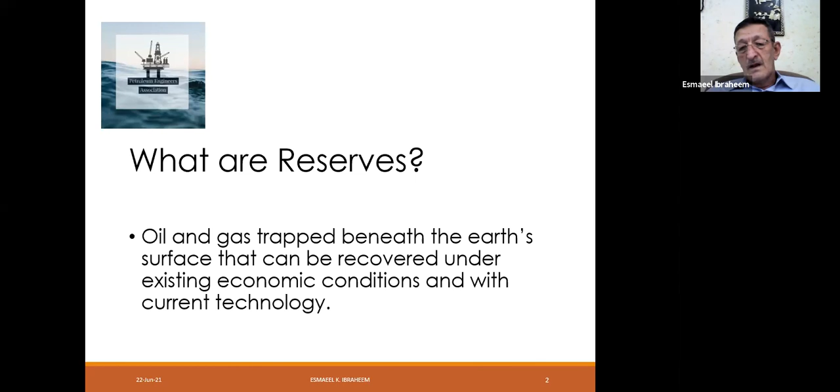First, there is a role for each person concerned with the petroleum industry. The most concerned person is the reservoir engineer. What is the role of the reservoir engineer? Optimize the depletion plan and economics. You have to look after your plan and how to optimize it. Develop reservoir models to forecast well and reservoir performance. This is done by simulation, and we will come later to what simulation will give you, and how to forecast the quantity of hydrocarbons and the performance of the well or the reservoir.

Also, reservoir engineers should perform reserve estimates and audits for financial accounting. By simulation or by the normal calculation methods, you estimate the hydrocarbon you have and be sure of the quantity you have. Then give it to the financial people to do the financial accounting and decide how much they will get from this result.

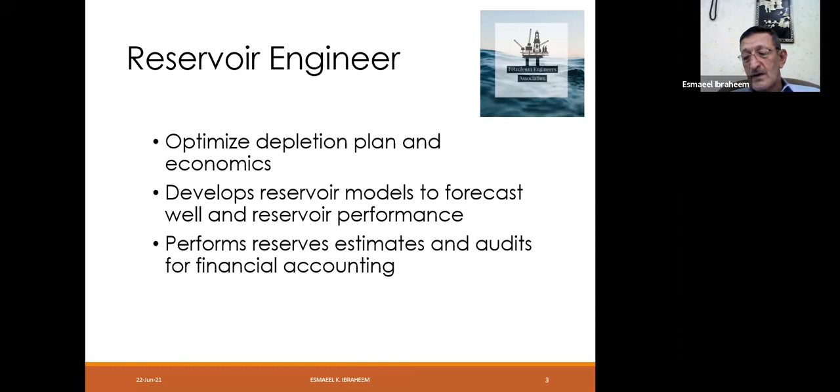This is your role, reservoir engineers. So be careful and be concise and be strict in your estimates, because later on you will be asked, oh, you gave us a wrong number, you gave us something that doesn't fit what we are seeing down there and what we can extract. So be careful, please.

Then, let's say for the discovery of any hydrocarbon, you have several methods. You have natural flow, you have artificial flow, and you have methods to improve recovery efficiency. If you cannot go with the natural, you cannot go with the artificial lift, which are the conventional recovery methods, then you have to go by improving recovery efficiency.

How to improve it? You can improve it in three ways. This is the enhanced oil recovery, EOR, and you can improve production or injection control. You have to have control over the production or the injection of any fluid you are injecting, either water or gas, or even sometimes we use some kind of flue gas, and some natural neutral gases like CO2 or nitrogen.

But in normal conditions, you usually use water to inject into the water zone in order to raise the pressure and the flow, and we push the oil. For example, we push the oil up to the required levels and push it to go through the producing wells. Then the third one is the strategic wellbore placement.

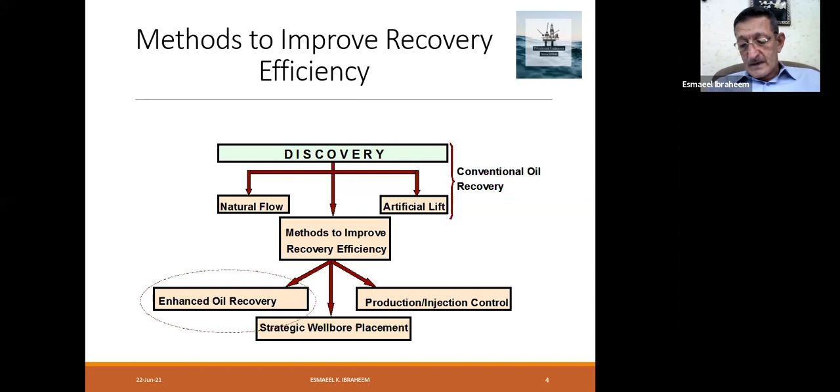Then what are the enhanced oil recovery or EOR processes? EOR processes include all methods that use external sources of energy and/or materials to recover oil that cannot be produced economically by conventional means. This is an explanation of the EOR, which tells you that this is the method or the process that you use

external sources, not the energy that you have, or the conventional means of producing this quantity of hydrocarbon. So you have to look for other energy to recover that quantity of hydrocarbon. So this is called EOR, which means that if you cannot extract or produce that quantity of hydrocarbon, then you have to use some external sources of energy.

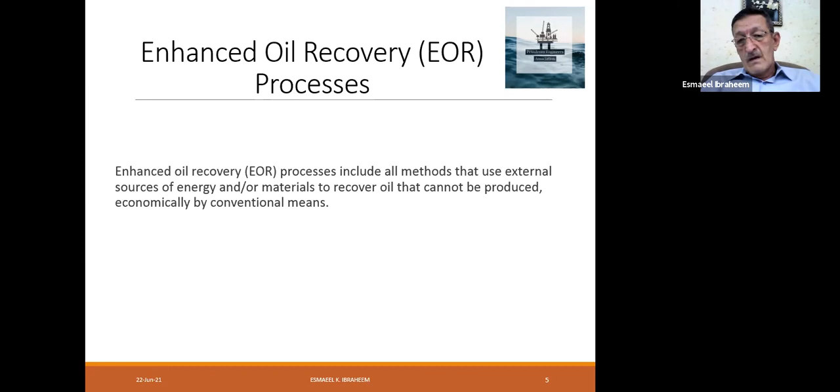Then, if we go to water flooding and enhanced recovery. Most of the companies nowadays, and I think you have seen so many examples of that, use water. They say that we inject water in order to recover the hydrocarbon. This is the traditional method actually. The traditional one is the easiest one, and the most available is water, so they can use it to recover what's left.

Most of the companies look after the economic side of the operations. So later on, if they find that this traditional method cannot be used to recover, or the recovery is very low, and the water oil ratio is rising, they go to the other EOR methods. The traditional methods are often called secondary recovery. Of course, as you know, we have primary recovery, secondary recovery, and tertiary recovery.

The primary recovery is one that uses the energy that's present in the reservoir, either by solution gas or by water drive or a combination of gas cap drive and water drive, or even sometimes gravity drive. And then we have tertiary recovery, where we go to the EOR.

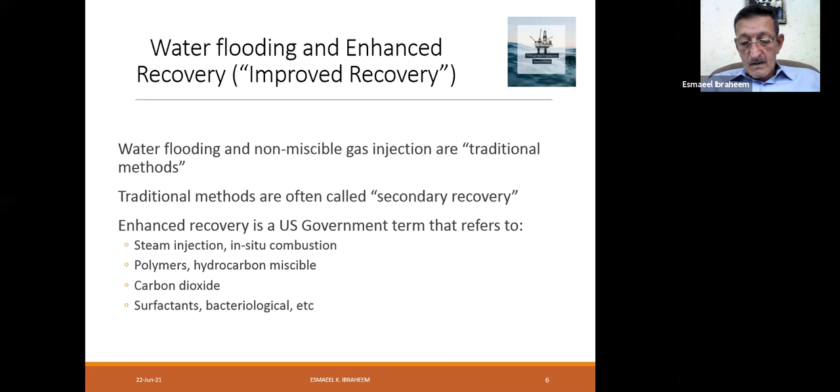Water flooding. The current improved oil recovery processes are water flooding, as we said. We explained what water flooding is; as all of you may know, it is a normal method. So water flooding, we have talked about it. Then we have thermal methods. Thermal methods include steam stimulation, steam flooding, hot water drive, and in situ combustion. Of course, we will talk about these methods one by one and see the difference between each of them.

And we have the chemical methods. In chemical methods, we use polymer, surfactant, caustic material, and micellar polymer flooding. This is a combination of polymers that makes the driving fluid that pushes the oil through to the producing wells, and we will go through them one by one later.

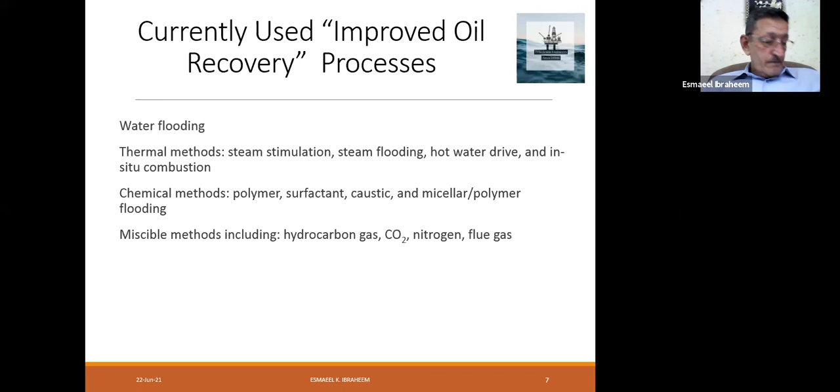All these methods, water flooding, thermal methods, chemical methods, and miscible methods, will come later one by one, but this is just to give you an idea of the meaning of improved oil recovery. These are the currently used improved oil recovery processes. In the detailed course, of course, we will have more time and more details about them.

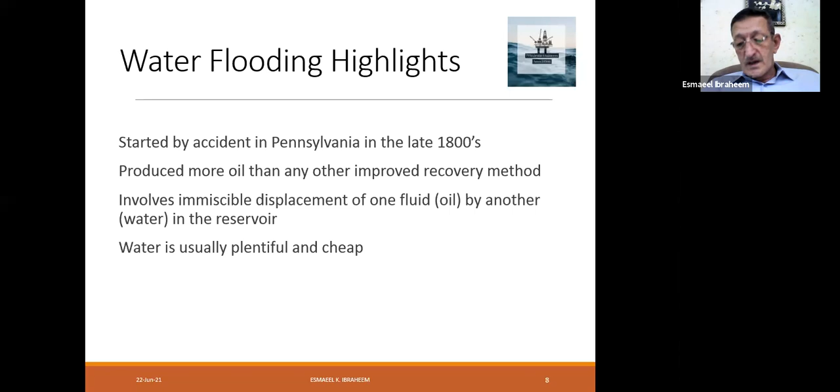Water flooding highlights. Water flooding started by accident in Pennsylvania in the late 1800s. It has produced more oil than any other improved recovery method. It involves immiscible displacement of one fluid, oil, by another, water, in the reservoir. Water is usually plentiful and cheap, so that's why it is widely used. Description: water flooding consists of injecting water into the reservoir. It is the most widely used post-primary recovery method. After the primary recovery method, we may use water flooding.

Water is injected in patterns or along the periphery of the reservoir. We have several patterns used for injection: 5-spot, 7-spot, 9-spot. A 5-spot is one producer and 4 water injection wells, and a 7-spot means we have 6 injection wells and 1 producing well. Why we use these can be explained later on.

The mechanisms that improve recovery efficiency in water flooding are water drive and increased pressure. When you inject water at the bottom or along the periphery of the reservoir, you increase the water drive energy and the pressure in the reservoir in order to push the hydrocarbon through to the producing well.

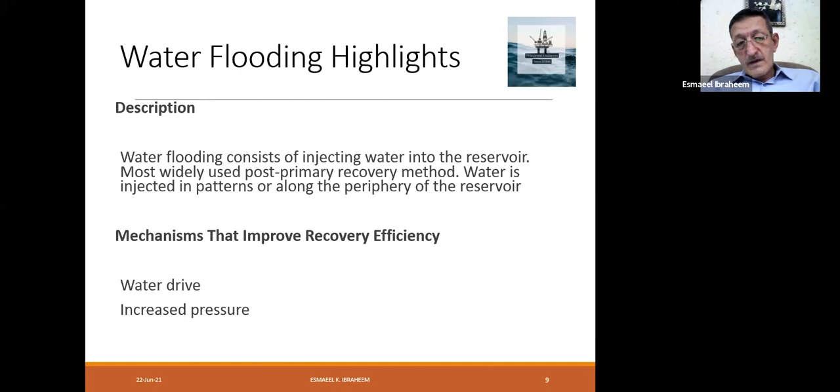This is in general, but of course some other units are present for the purification of the water used in the injection.

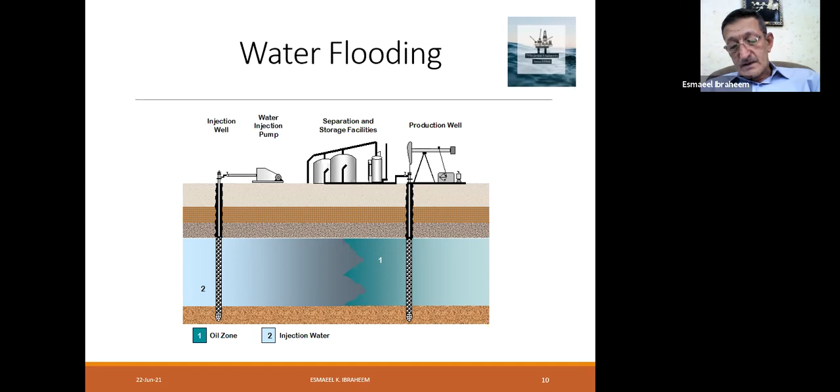Water flooding has limitations also. If you have high oil viscosity in the reservoir, that is if the viscosity of the oil is higher than the water, then you will have a higher mobility ratio. That's where you will face fingering of the water, and the water will be produced from the producing well earlier than the oil. Some heterogeneity is acceptable, but avoid extensive fractures.

When you have extensive fractures, water will also come out earlier than what is expected and was supposed to be. The challenges: poor compatibility between the injected water and the reservoir may cause formation damage. When water pushes oil, if the viscosity of the oil is higher than the water, then you will leave too much oil in the reservoir.

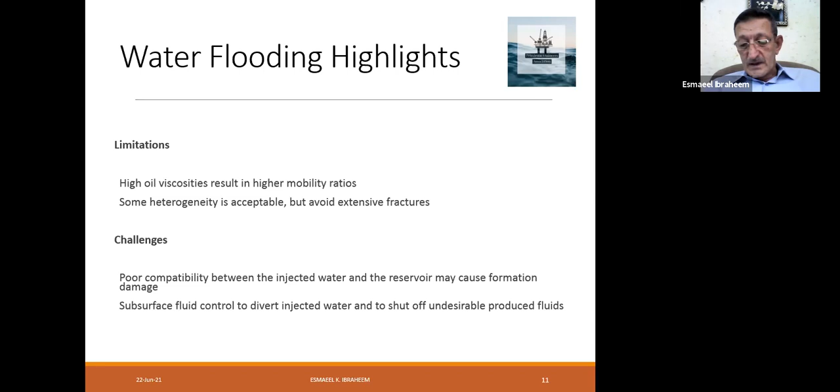Then we have immiscible displacement. Immiscible means that the interfacial tension between two phases in the reservoir, water and oil, is greater than zero, which means that, in order to avoid producing water before producing oil, you have to have a higher interfacial tension between the two fluids. Thus, the two phases cannot mix molecularly, so that they don't mix.

Understanding immiscible displacement requires a knowledge of frontal advance theory. Here we don't have time to explain what frontal advance theory is. You may go back to the references, Reservoir Engineering by Dake, and Craig. Dake explained it in chapter 10 and Craig explained it in chapter 3. So take note of that reference if you want to see the meaning of frontal advance theory. And maybe some of you have studied this in college.

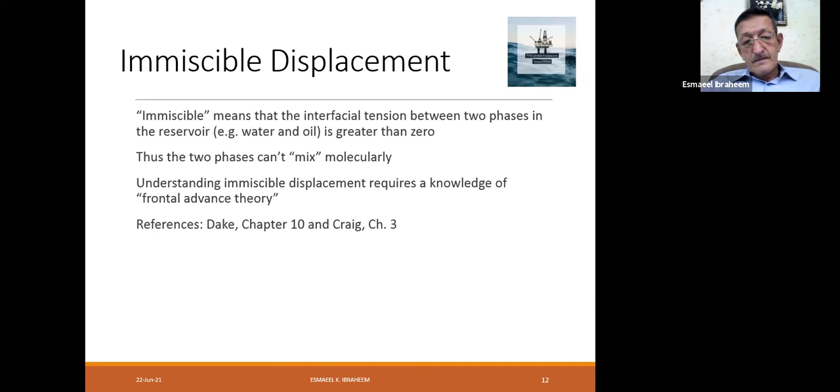Polymer flooding, highlights and description. Polymer-augmented water flooding consists of adding water-soluble polymers to the water before it is injected into the reservoir. I think it is quite clear what we mean: we add a polymer to the injection water, and then this injection water will mix together with the polymer and can be injected into the reservoir.

What are the mechanisms that improve recovery efficiency? Here we have mobility control by using certain polymers. Of course, for polymer flooding and any other chemical flooding or any EOR, you have to have a pilot plan or pilot wells that you inject. We use it as a trial just to see whether this is working or not, and mostly with polymers, because polymers are very sensitive materials, and we have to have the right polymer for the reservoir, depending on the characteristics of the oil in the reservoir.

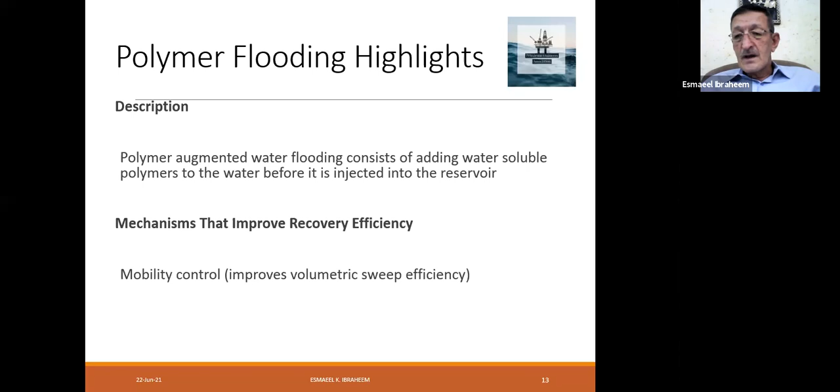So you can push the oil to the producing well, and then when it goes up to the surface, you use the separation and storage facilities in order to separate the oil from the polymers, and then pump it to the mix storage facilities.

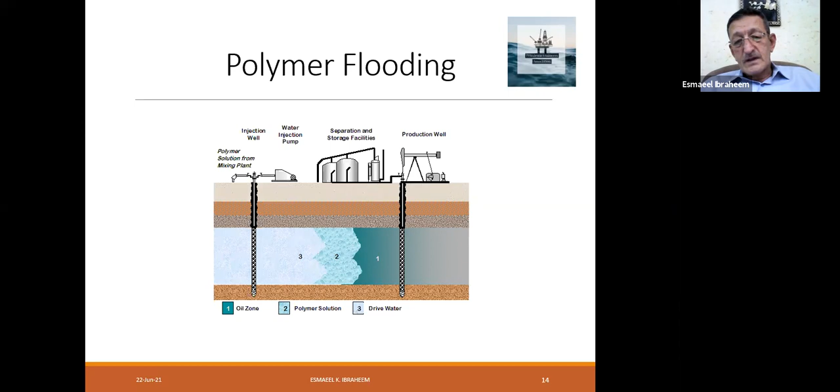Polymer flooding limitations: high oil viscosities require a higher polymer concentration. If you have a high viscosity oil, then you have to have higher concentration. Results are normally better if the polymer flood is started before the water-oil ratio becomes excessively high. In this case, you have to start the polymer flooding before the water-oil ratio becomes higher than acceptable. So several tests have to be run before deciding what polymer and when to use it for flooding.

Clay increases polymer adsorption. If you have clay within the producing formation, then you will have a problem: the polymer will be adsorbed by the clay.

Some heterogeneity is acceptable, but avoid extensive fractures. As we said, extensive fractures will lead to producing the polymer before producing the oil, or increase the polymer-oil ratio. Also, the cross-linked or gelled polymer techniques may be applicable.

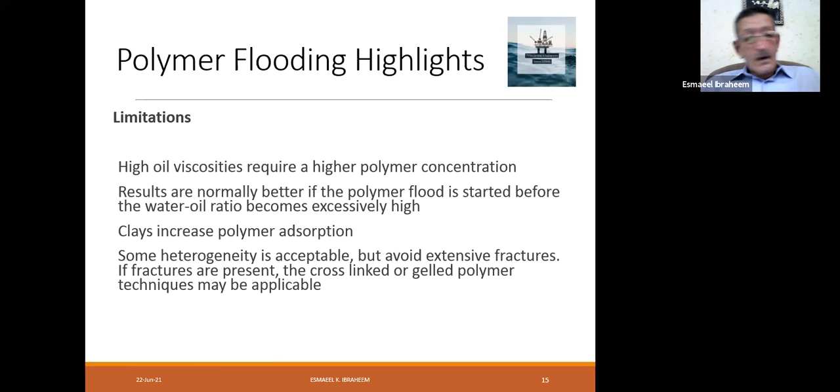Challenges of the polymer flooding are lower injectivity than with water, which can adversely affect oil production rates in the early stages of the polymer flood. So lower injectivity - of course, for some formations you have to test the formation and its water injectivity, and when mixed with polymer, what is the injectivity of the formation.

You have to also take care into - you have to consider this before using the polymer.

Type of polymers: acrylamide type polymers lose viscosity due to shear degradation, salinity, and divalent ions. Xanthan gum polymers cost more, are subject to microbial degradation, and have a greater potential for wellbore plugging. So the xanthan gum polymers and the acrylamide type polymers are less used than supposed to be around the world.

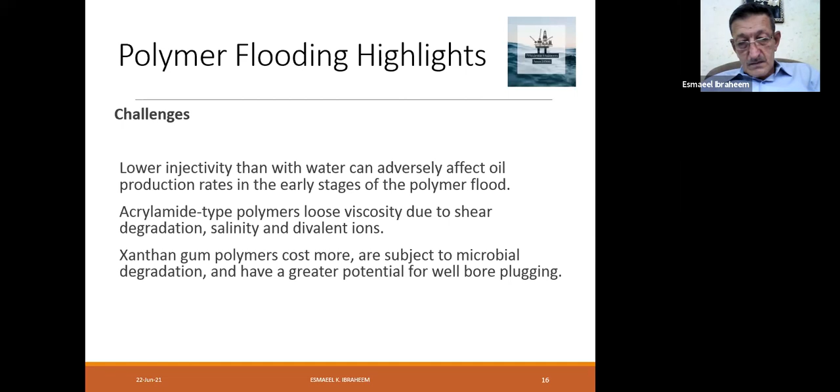So be careful when you choose the type of polymer that you are using.

Surfactant flooding. Surfactant flooding consists of injecting a slug that contains water, surfactant, electrolyte which is salt, usually a co-solvent such as alcohol, followed by polymer thickened water.

You have to be careful in choosing such a surfactant, which contains a lot of material here: water, surfactant, electrolyte, salt, usually a co-solvent, alcohol - this is a very expensive part of the flooding, besides the polymer. And polymer thickened water: as polymer is mixed with water, it will thicken over time.

What are the mechanisms that improve recovery efficiency? Here we apply this method and it will affect interfacial tension reduction, improving displacement sweep efficiency. During the pumping of any surfactant or material, the surface tension will degrade and be reduced over time. So we use here the surfactant and polymer flooding.

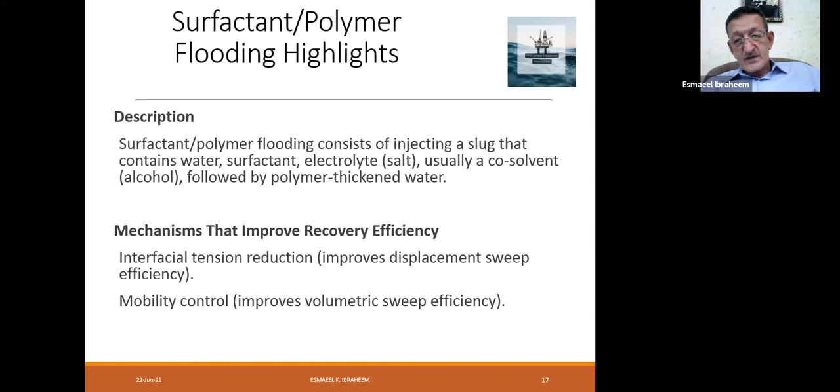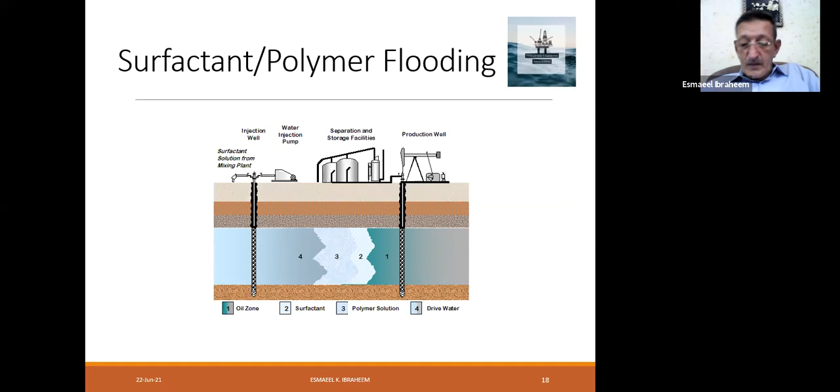What are the limitations? Limitations of this surfactant polymer method: an areal sweep of more than 50% for water flood is desired. Relatively homogeneous formation is needed. High amounts of anhydrite, gypsum, or clay are undesirable.

So you see, the limitations are very strict, and you have too many hurdles to overcome in order to use this method. Available systems provide optimum behavior within a narrow set of conditions. With commercially available surfactants, formation water chlorides should be less than 20,000 ppm, and divalent ions - calcium and magnesium - should be less than 500 ppm.

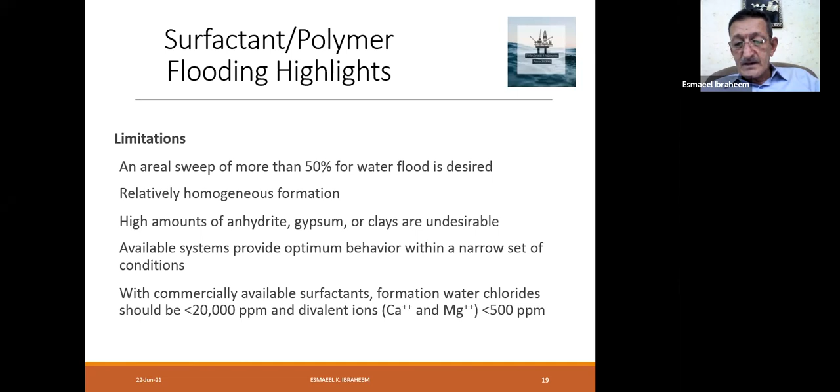Challenges: complex and expensive system, possibility of chromatographic separation of chemicals, and high adsorption of surfactant. Interactions between surfactant and polymer may happen, and degradation of chemicals at high temperatures. You have a lot of obstacles in your way to use this surfactant flooding method.

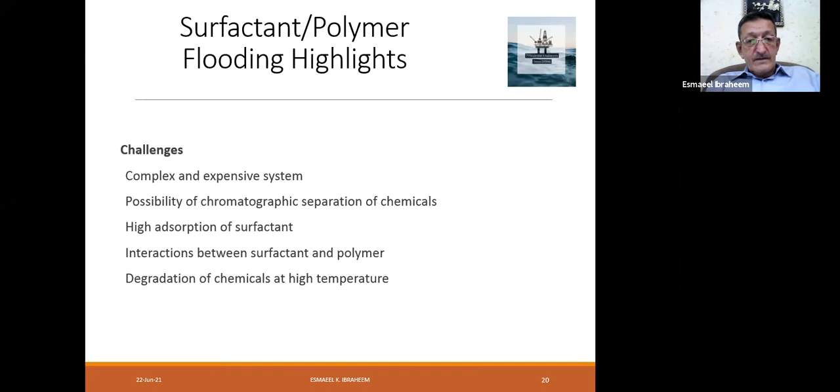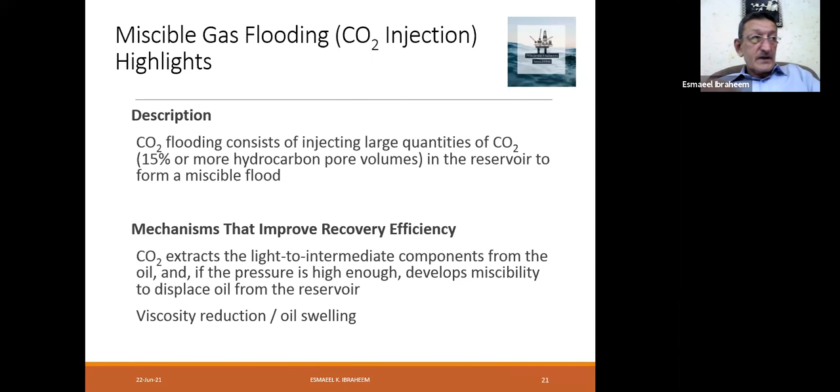The mechanism that improves recovery efficiency: CO2 extracts the light to intermediate components from the oil, and if the pressure is high enough, it develops miscibility to displace oil from the reservoir. What happens down there is that the CO2 will grab the light to intermediate components of the oil, and if you have higher pressure, it will mix with the oil and develop miscibility to displace it from the reservoir.

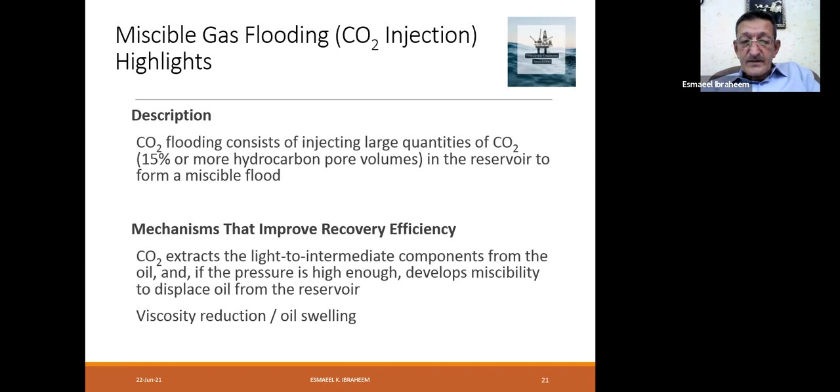And then viscosity reduction and oil swelling. This CO2 injection method is now widely used because it is more effective and economical, and CO2 these days is available with certain plants that produce CO2 for injection, but it needs a high quantity of CO2.

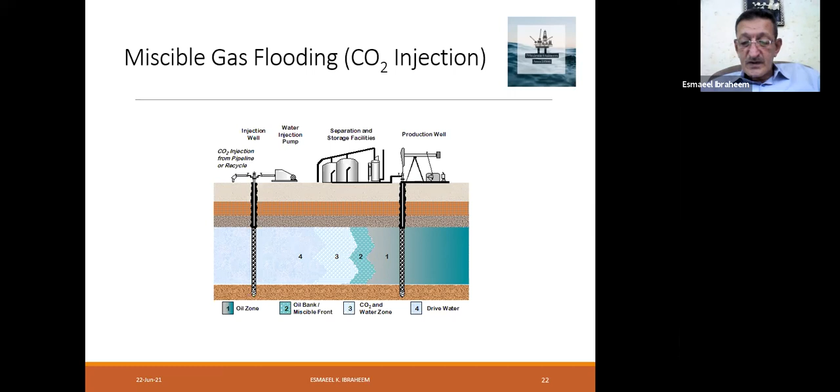Miscible gas flooding, CO2 injection limitations: very low viscosity of CO2 results in poor mobility control. The availability of CO2 - sometimes it is not available as required, so you have to wait, and you have to have storage facilities for the CO2 in order to come up with the required quantities to be injected.

And the surface facilities, as I said, we need very complicated surface facilities in order to separate the gas, the CO2, from the oil and reuse it again. This is very difficult in the field. But these days there are several companies that can offer you these facilities at a certain cost, and this is an extra cost that should be added to the cost of the whole operation.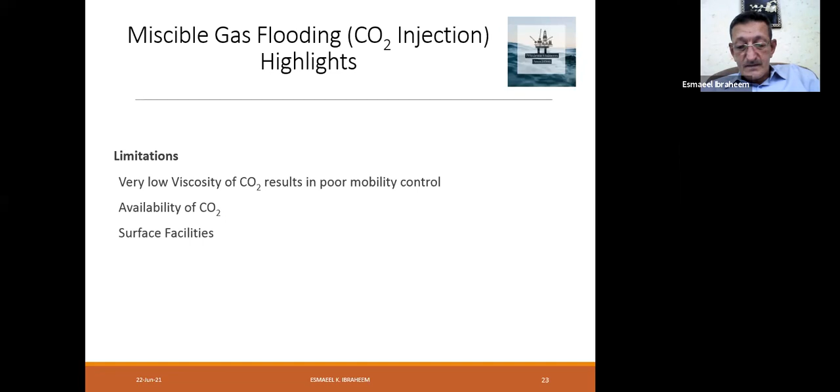Also, the challenges. This is actually the last slide for this session, and I will give you a few minutes in order that you can prepare your questions.

Challenges: we have early breakthrough of CO2 because of the viscosity difference between oil and CO2. Corrosion in producing wells - the mixture of CO2 with water will make a corrosive material that corrodes the downhole facilities. The necessity of separating CO2 from hydrocarbons, repressuring of CO2 for recycling, and a large requirement of CO2 per incremental barrel produced.